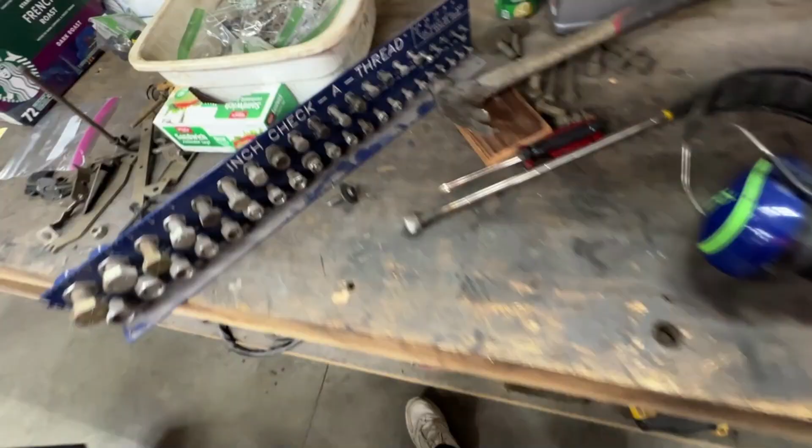I started straightening out all these bolts and I just decided I'm going to finish. I don't like this. I don't need all this stuff, and when I go searching, it just takes too long. I mean, I got tons of stuff. I think it's easier just to keep it in bags.

Okay, so now I gotta whittle down. Look at this, those are lock washers. I went through and sorted all these. They're 3/8/16, I'll never need them. I mean, I might need one or two or three, but I never really do.

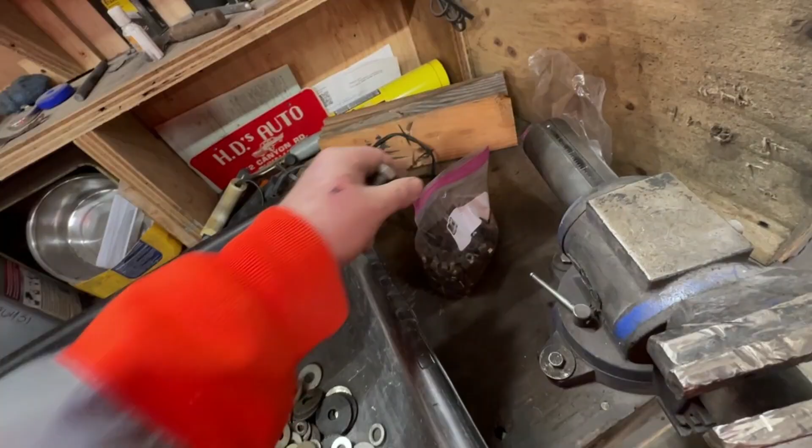Screws, washers. This is driving me insane. And I still got a whole bunch of smaller nuts. I'm making a little bit of headway.

I don't want any of that. Okay, I got two more of these. Again, they've been sitting around for 8 years. They're no good to me because I don't know what's in them.

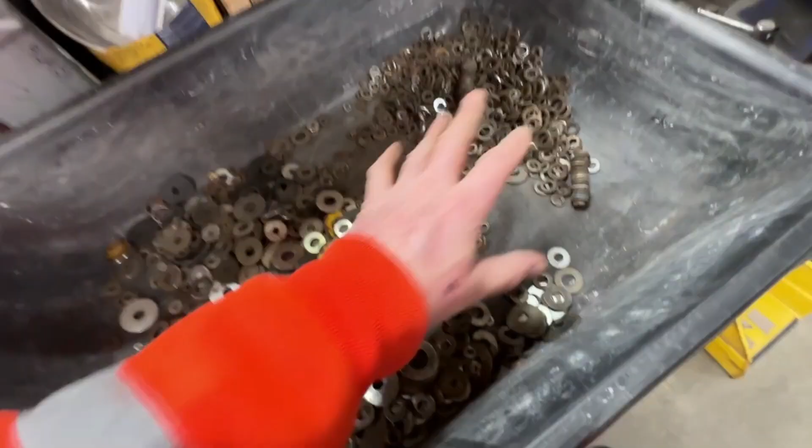Again, I'm just looking for little stuff like this. I found these. I'll never use these because I hate these locking ones. I don't think I need any more of these. Maybe I still got another thing of nuts. The socket I was been looking for.

See this here? Way back in the 80s, when we needed to get water on a job site, you put this on a fire hydrant, hook your hose to it, and then you can get water. A wrench to turn the hydrant on. So it's been sitting there 8 years.

Okay, I finished this thing up. So that's that size bolt, that size washers, lock washers, flat washers. These are all car parts. And these are my screws that I use when I do woodworking. Just put them in a bag and then dump them in here when I need it. Some nuts. Just oddball stuff, just another oddball stuff.

That's 3/4 full, it's heavy. Okay, I got this area straightened up. This is half full. I guess this is not quite 3/4, but there's a lot. This sucker is heavy.

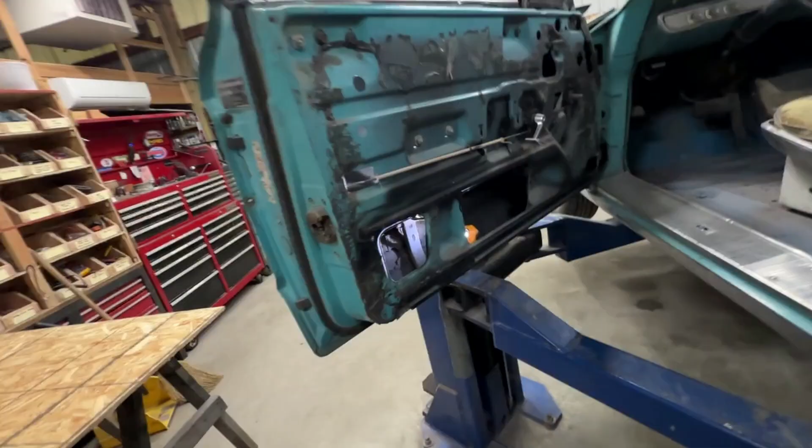Okay, so I gotta take this window out. So I decided to look at the book first. It's model 63C or 76B. Front door window mechanism, 63 and 76, page 1733.

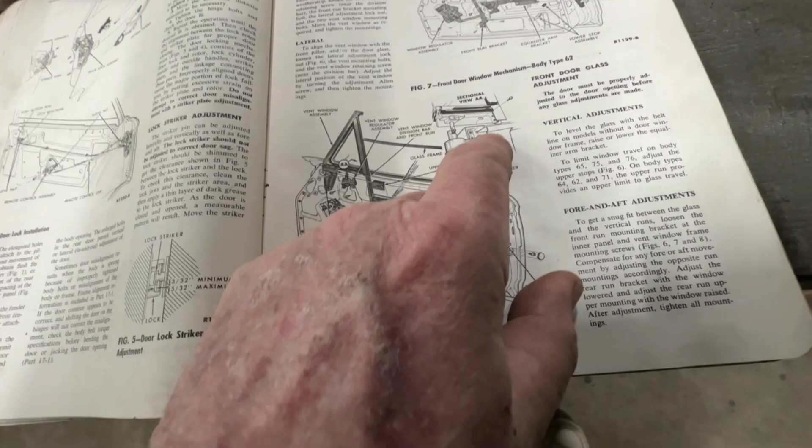So I'm just gonna look at this, see if it looks the same. This is for adjustments, I want to find removal. So on page 1740, front door glass removal installation.

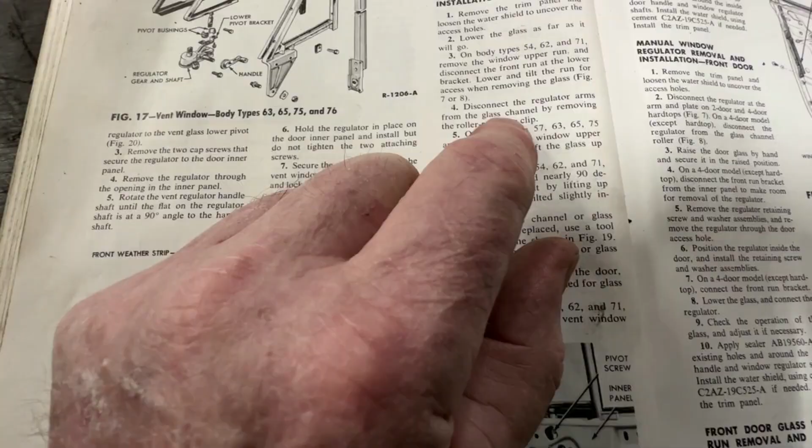Remove the trim panel - oh, that must be the inside door trim. Lower the glass as far as it will go, or disconnect the regulator arms from the glass channel by removing the roller retaining clips. There's a clip right there, and there's a clip right there. So according to this, remove those clips.

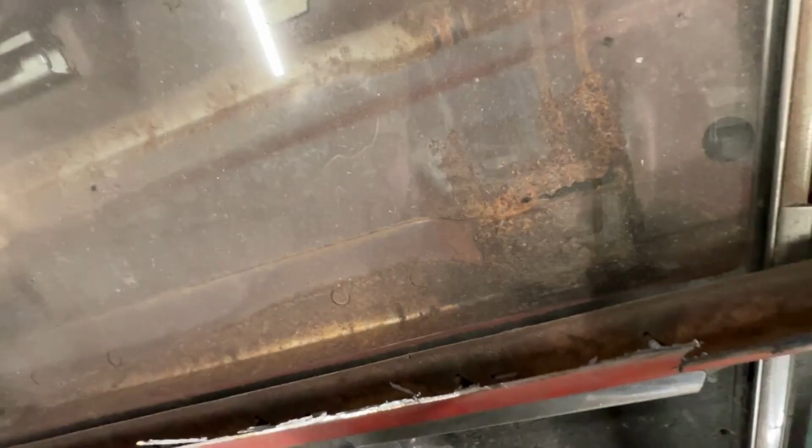Remove the window upper stops. Figure 6, here's figure 6. 63, and there's the upper stops. I guess these are them. I'm looking through, there's one there, and one there. It must be these two bolts here, and these two bolts here.

You see a clip right there, and a clip right there. This is the trim panel I guess they're talking about. And it should come out. It's pretty simple - that seems too simple.

Okay, I got the clips out. I just stuck a tool in like that and pried them out. Okay, so I got the stops out. This one I was able to slip through here. The other one I just dropped.

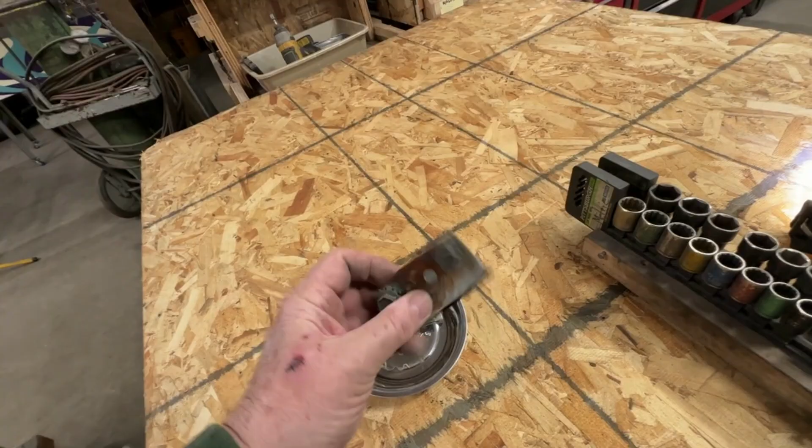But this has to come out because when the window goes all the way up, it hits here. So I'll take it out and then I'll show you how to do it. Yeah, undo that, undo a bolt in there. Undo these two, I believe. So we'll just look here.

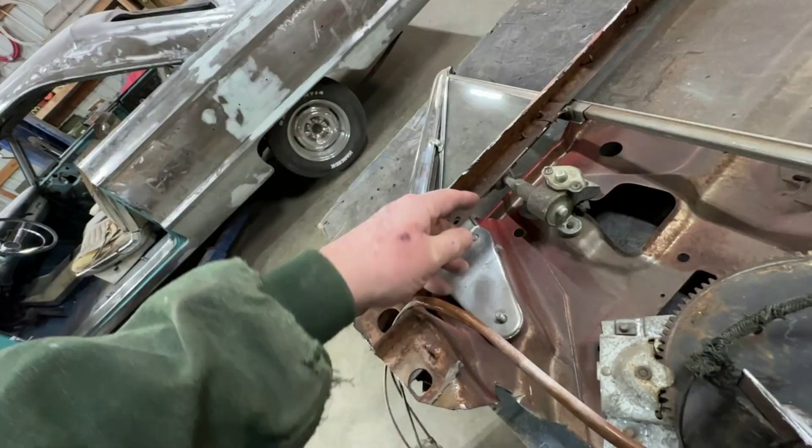So I took these three out here. I took that one out up there. You can see there's a hole to access it. And now I got to take this one out.

Can't film it, it's too tight in there. No, you got to take this out too because this window has to tilt, but it can't because this is in the way. So there's two bolts right there, I'll take those out.

There's this bolt down here. I was trying to pull it out. There was a screw right in here.

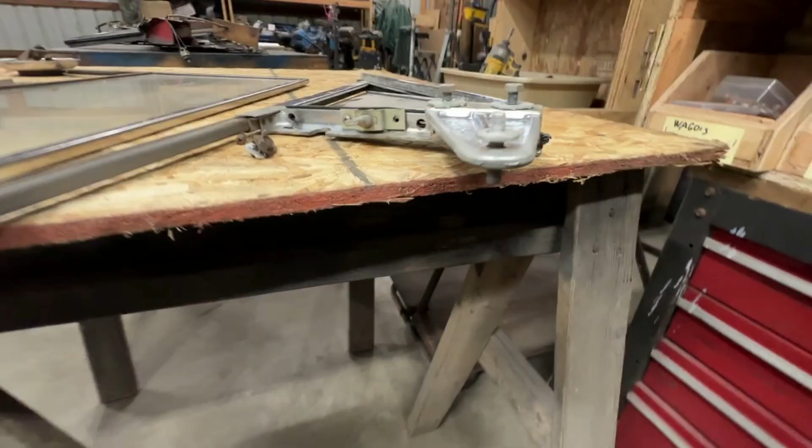And you take that out. Here's the pieces that go here. Now this piece right here, it was kind of hanging up on that, so I had to slide the window.

But this will come out, but this is an adjustment of some type. I didn't want to take it out. Here's the rollers for the window.

Now, once you pull these pins out of here, then you got to pull the regulator out of here. You pull the pins, pull the regulator out, it kind of snaps out.

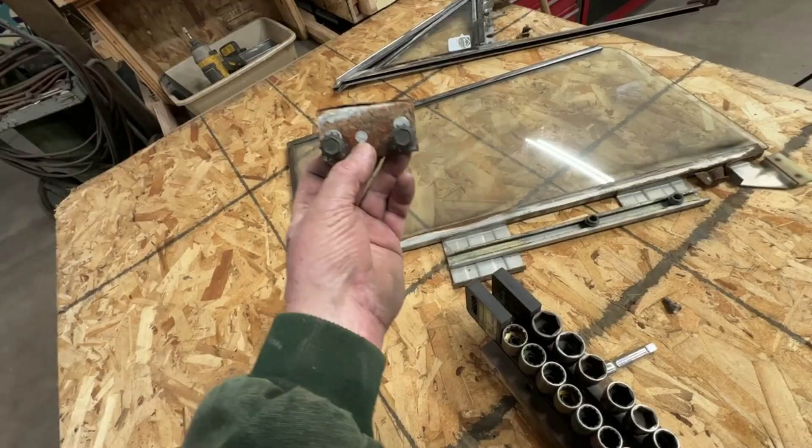Take these two door guides out that are at the top. This fits into the glass. You can see it's all worn out.

Then that's it for getting the window out. But this is in the way, so this has to come out first. Take these three out.

Again, this is adjustable. I could have took this out because it kind of hangs up. In other words, this has to go down.

I believe this. Trying to put the pieces back. I believe this was here like this. This was here.

It's this one. And this one goes here. Yeah.

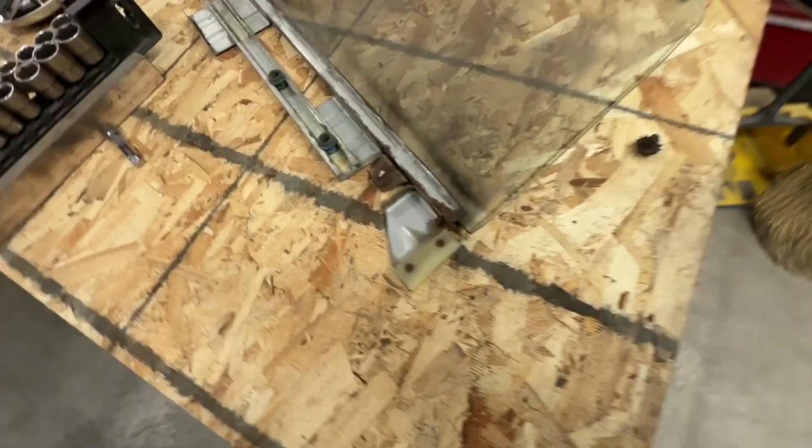Now just to inspect it, I mean it's rusted. The rollers are completely dry. But they're not wasted. What I did notice, see this piece right here?

I found this inside the door. I think this probably went right there. That's some kind of stop. It really should be on there.

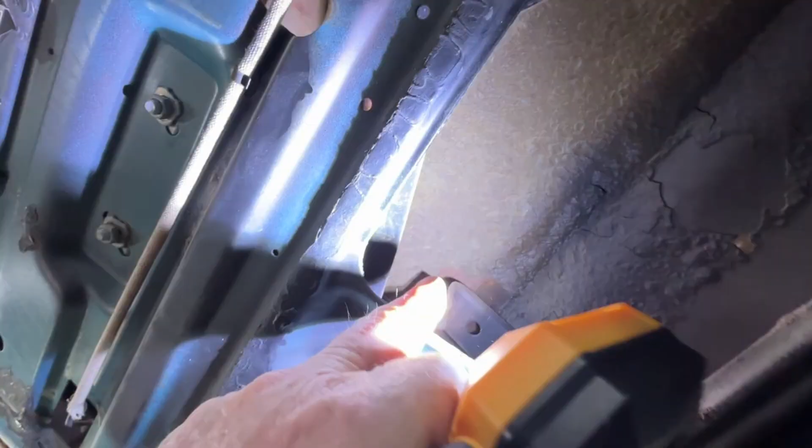And that's it. So, going back to here, let me turn this light on. And here's the regulator here and there. So the other piece is this.

Again, to give you perspective, the window slides in here, which has got some kind of material on here. When I go look at these, all this material is falling out of both of them.

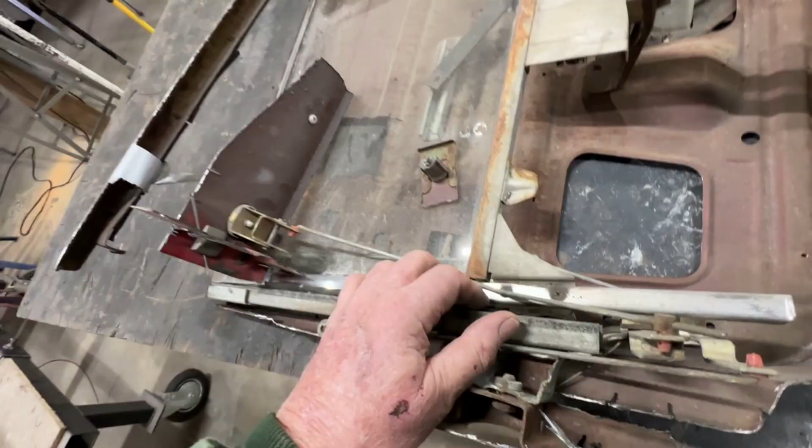There. And here. So really the window slides on this material on that side. On this side, there's some kind of material in there too.

How do I get that on there? That was held on by a rivet, but the glass has to come completely apart to get it back in.

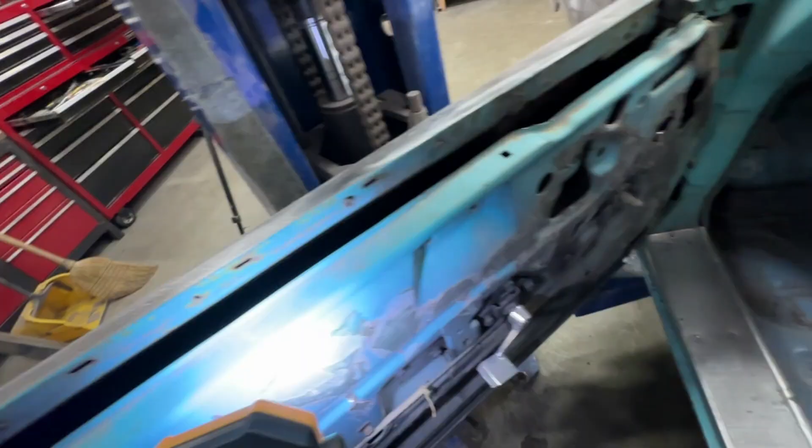Looking down inside the door, I don't think I need to take that regulator out of there. But if I did, 1, 2, 3, 4, 5, 6 bolts, but I don't see a need to take that out.

If you look down in there, there's that pin that has to snap out. But anyway, I gotta get the lock out. So let's go look at this one again.

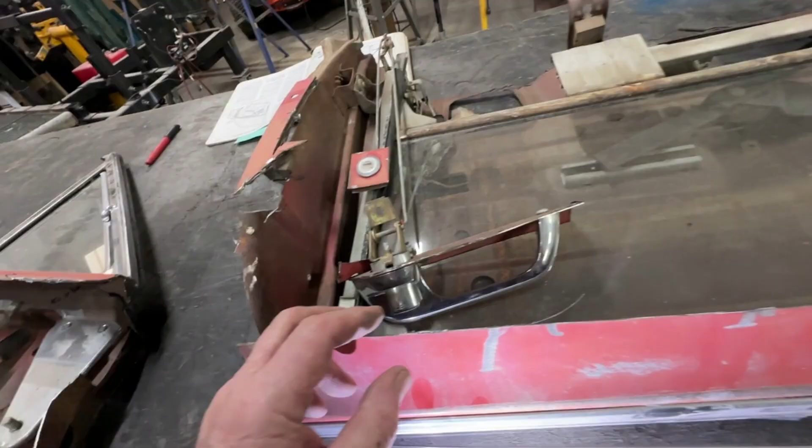So the window had to come out to get that out. Either the window has to be all the way up or out. Then I guess you put a screwdriver in here and a screw here.

So if I take those two loose, I'm just wondering how to get it out of here. Yeah, I got to take it off to paint it and prime it.

Now it looks like this screw has to come out of here. Or maybe the whole thing will fit through that hole, I don't know. Let me try it right here. I'll take these screws out, pop that loose, and see if I can get this out through here.

I wonder if they sell these pieces. I also have this clip here, but I could have taken it off.

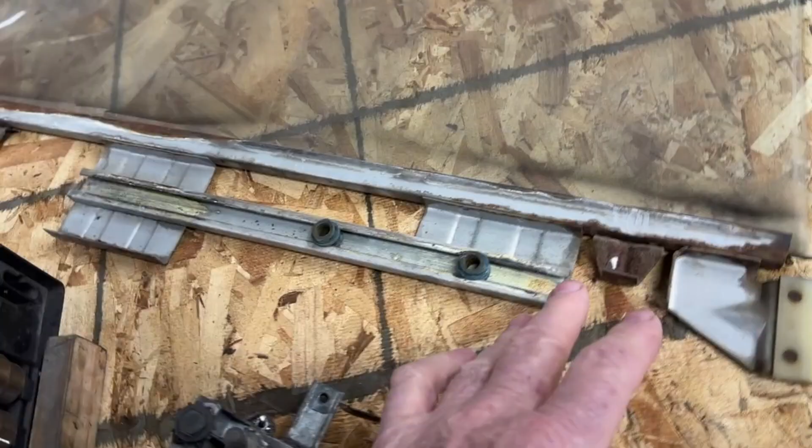But I was thinking last night, this window is missing this, or that piece is. Does this other window have that still on there? In other words, can I use this window?

Yeah. Again, this is why I saved these doors. This is why I tore it apart. Gives me an inside look on how things go together. And in this case, I can use this window.

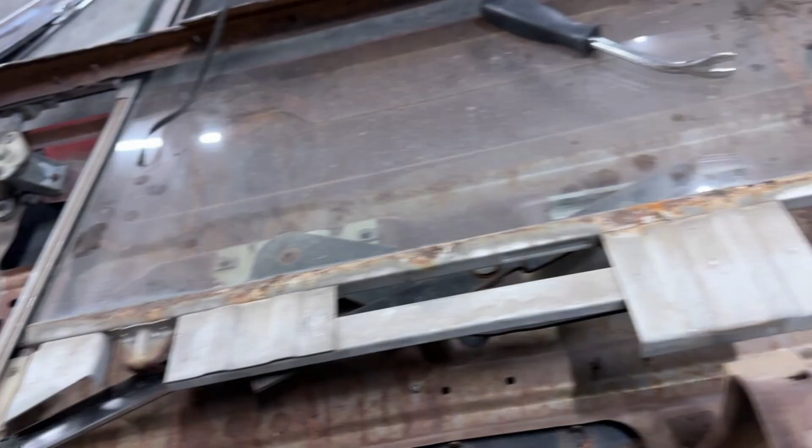Now again, this door is the driver's side. This is the passenger side. This door goes like that. And this one, if I was to stand it up, goes like this.

I think I'm gonna take this all apart next, at least the parts that I need for now. Again, it's just a big mess, it takes up my whole table.

That's the whole thing about working on cars. Okay, what else am I gonna do before I take this apart? I usually take a lot of pictures, but even pictures are hard to find. But anyway, this is for me - this is how it's gonna go together later.

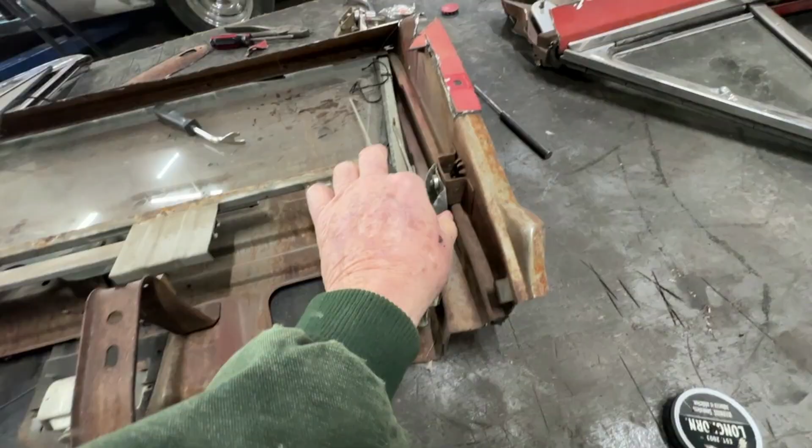This rod is the shorter one, I think. That's the key, I think. This is the longer one. This is the push button, I think - so I already forgot. We'll go over and look at that one. This has got an adjustment here, by the way, it's threaded. So let's see what else can we see that I might forget.

Now here's a back view of the lock. I can't remember if I said this or not, but this mirror, which I might use - how does that, this will not physically fit through that hole. So did they put this together here on this end, or does it come apart inside of here somehow? So that's another mystery I got.

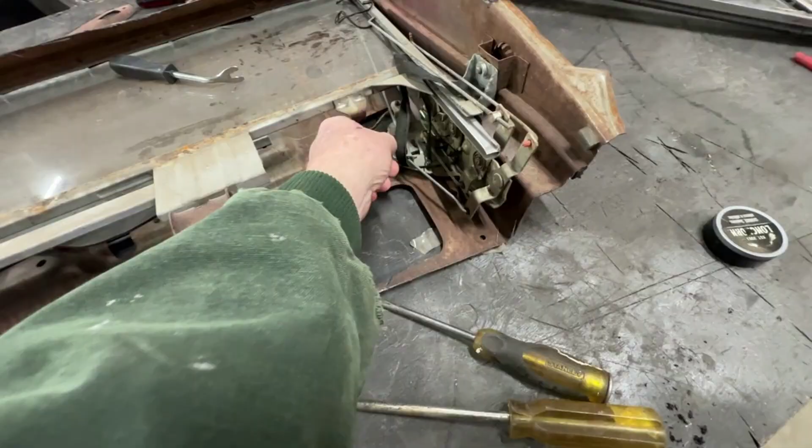We already went over this. Let me just concentrate on this one more time. So there's also two rods down here. This rod is going up to the door latch pull that you lock your door from the inside. And this one is - let's see, what does it do? It's part of the same mechanism somehow.

Let's see, it goes from the door pull, the lock pull on top of the door, and then it goes up to the key, I believe. So I think that's enough information. Then we got this other one in here that is going - I can't see where it goes. Let's see, where would it go? That must be the door handle. So the door, let's see, how does this work? You can unlock your door with a handle, with a pull, or the key. I think that's it, I think that covers it.

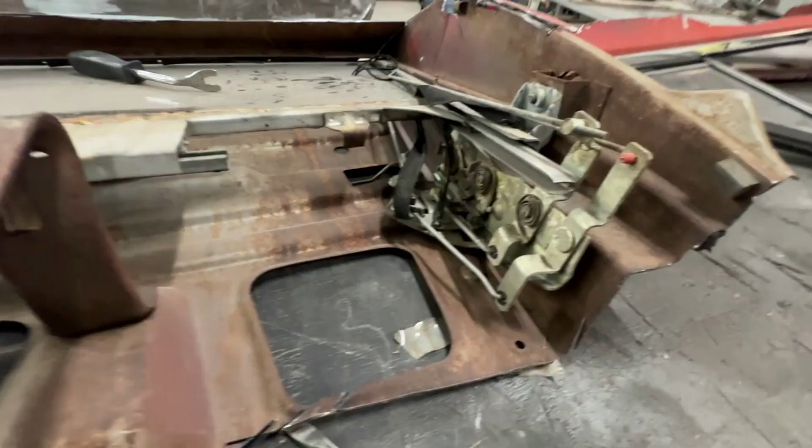I'm gonna do close-ups and go slow.

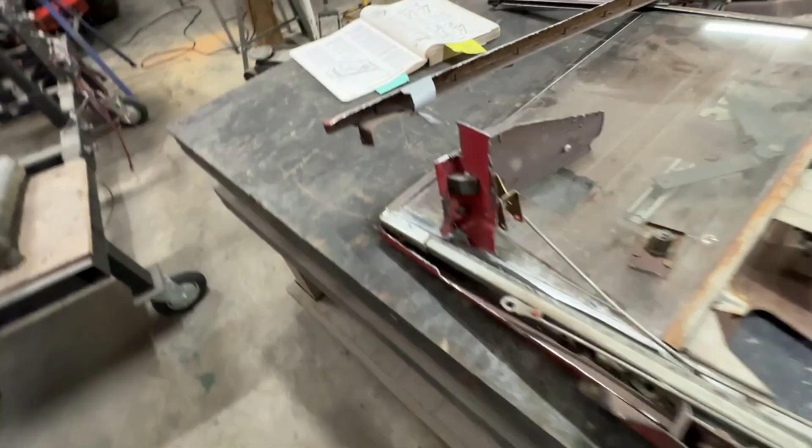I think that's it, so let's just - I was asking myself a question. This longer one, we'll go to the other door. This longer one does go to the key - to the lever, not the key. And the shorter one is the key. And again, here's those pieces. They sell a different type, but I think they'll work, and you saw that I ordered them.

I don't know, I'm thinking I'm just going to take these doors completely apart and get rid of this metal. I don't think I need it anymore, because it's on video, right?

So on the light, there's a clip right here that holds the wire if I want to use the lights. Is there anything else that I need to remember?

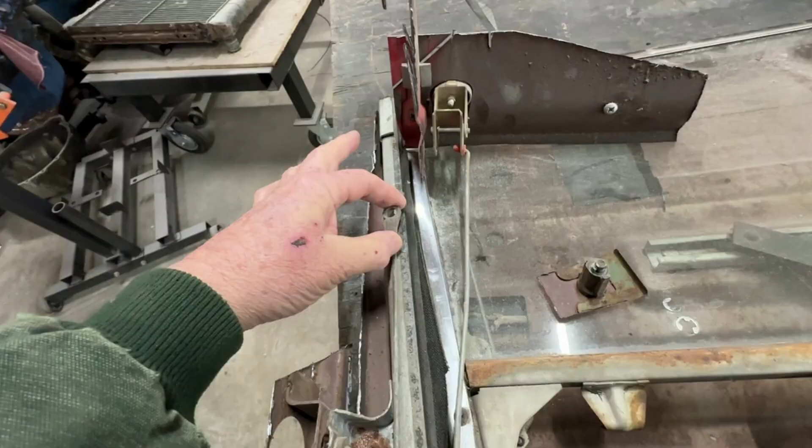Oh, let's just look at these clips, in case everything gets put in a pile. The littler clip is the key, and it happens to be facing straight up. I don't know if that's right or wrong, you know what I'm saying? This notch - I mean, maybe it goes that way, that way. I don't know, I'm going to try to keep all this together. We'll see what happens. Oh yeah, one more thought.

Are all these parts left and right doors? I don't know. And that mohair that I was talking about, like fabric, and it's really thin, so I don't know. I mean, maybe I could make it, I don't know. Anyway, these are just observations - they're on my video, I can look at it later. There's nothing worse than taking something apart and you cannot remember how it goes together.

Yeah, I think another thing I'm going to do is, for now, cut this open so I can get this out of here until I have time to think about it more. I want this in one piece.

So I marked this - again, I don't know if it matters - driver XL, passenger XL, and then same thing, but not XL.

So what can I take? The thing is, it needs to be flipped over to take apart, except I can take - let's see, I gotta flip it over.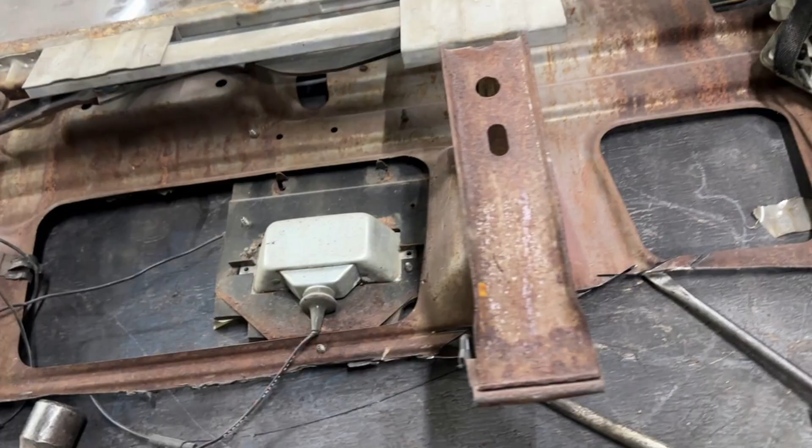Anyway, that's where I'm at. I guess maybe I'll film this - anybody interested? But basically, you saw everything. Everything that I know, you know now.

The other thing I was wondering, are these opposites? So here is the one I took out of this car, out of the non-XL, the driver's side. So we'll go - this is the driver's. No, we'll go to the passenger side.

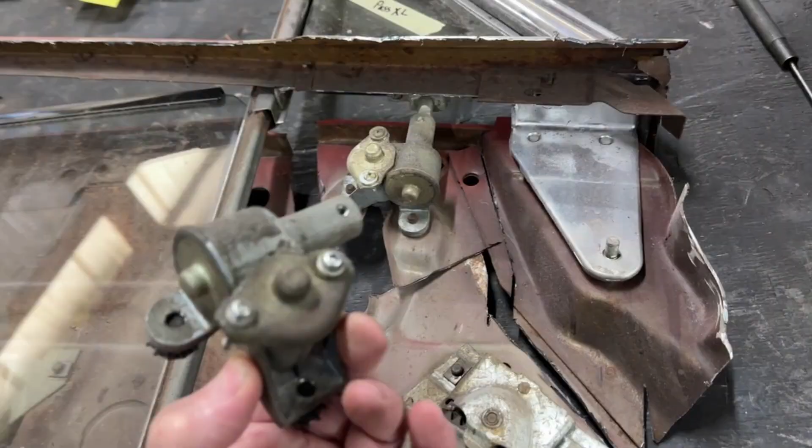Yeah, they're opposites. So these are opposites. If anything else is an opposite, I don't know. Probably everything. Which reminds me, let me put this over on this table for now to keep it organized.

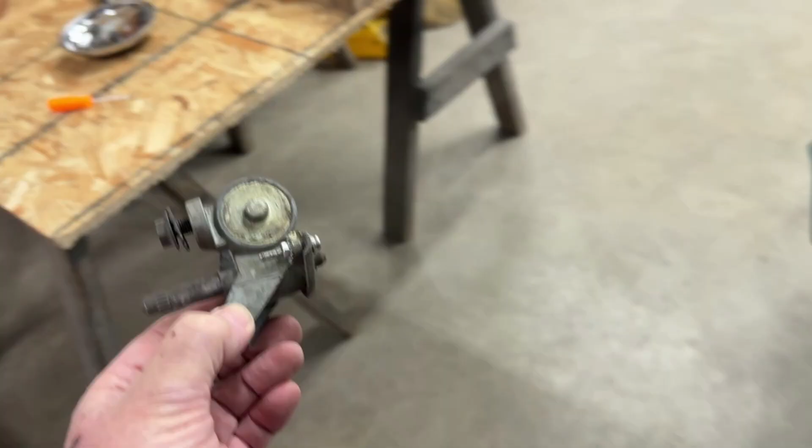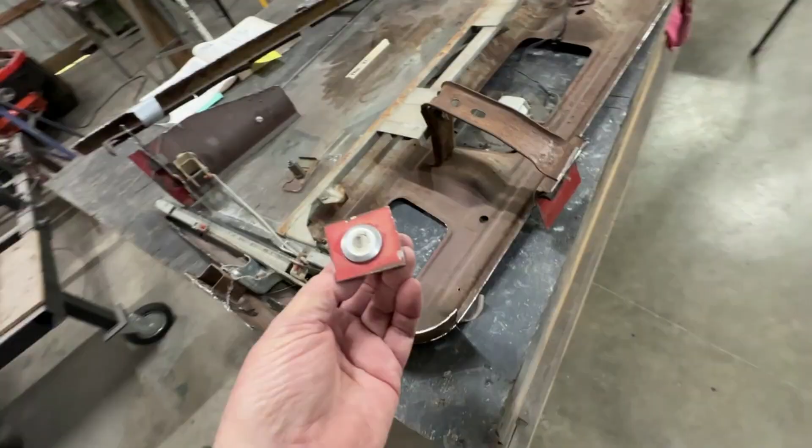Are the keys different? Let's see, I haven't taken that one out yet, but where am I? This is the one from the driver XL. This is the driver XL, and this is the passenger. So what does that mean?

And what did I do with that rod? It's already... I got to keep track of this stuff. Let's see, is it different? I don't know what's top and bottom. I don't think it matters.

I got to take two of these locks into the locksmith to get them keyed. And by the way, there's a big clip here that holds this to that.

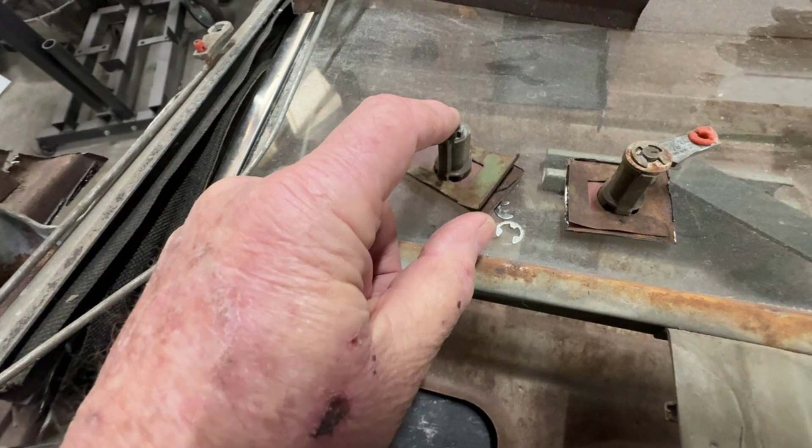Again, for me, because I might have forgot, this is for me. This is how this looks. There's also a rubber bumper here.

That's got to be it, right? What else do I need to know? I think that's it. Except, what did I do with that piece? Where is this piece? Oh, it's right here.

I'm just wondering, does it matter when you put it back in the car? You see this side bump here. I'm sure one of them goes up and one of them goes down. Or else the lock is upside down.

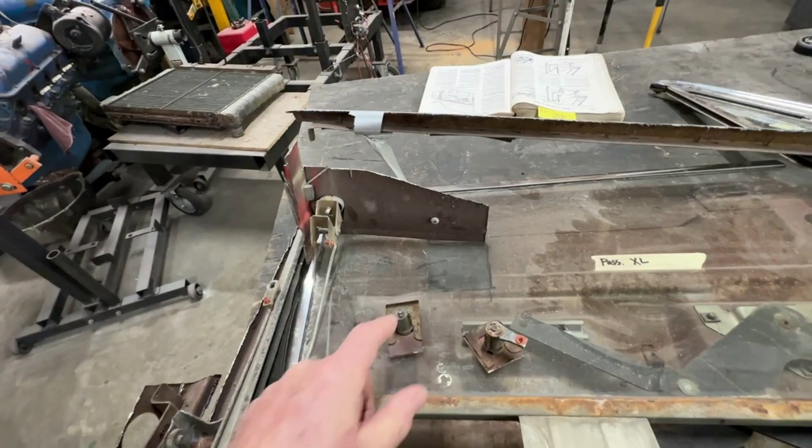So I'm gonna go look at this car. I'm gonna try to add that into this video. Does this go up or down or sideways or what? Okay, let's see if we can figure out that question right now. Again, this information will be valuable later.

So looking down inside there, this clip right here, you pull it out from outside the door. See, there's a long side and a short side. Yeah, the short side is up.

Another thing I wanted to document is this rubber piece right here. I mean, this one looks okay, but that's where that piece goes. That's it. I'm gonna take everything apart.

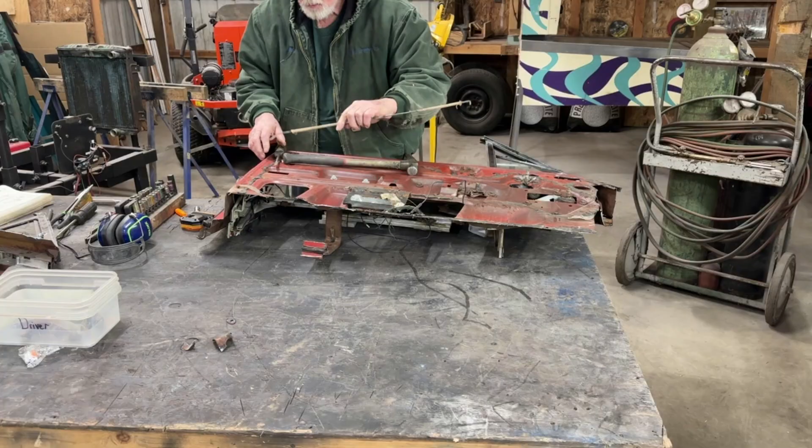I think there was a screw there. It's all rotted.

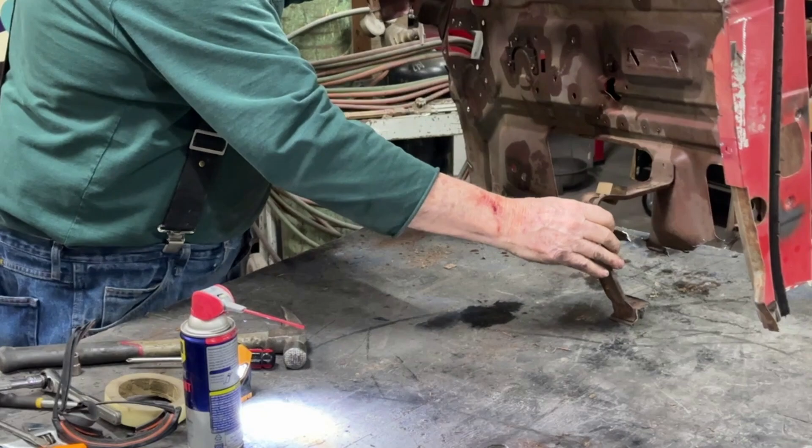That's the bottom doorstop. This is all garbage now.

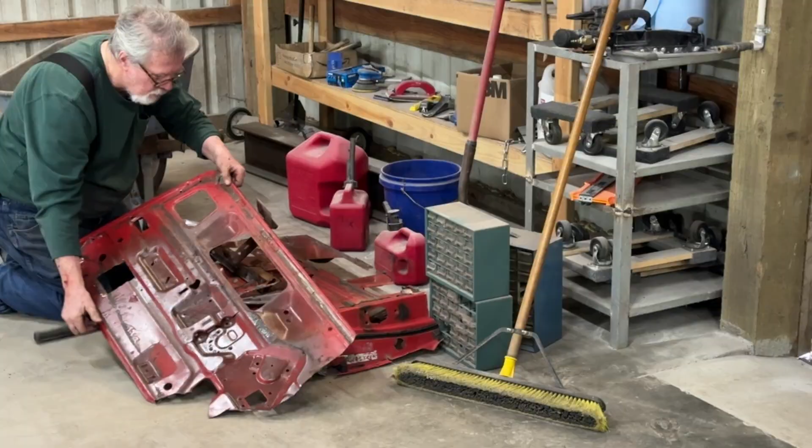Anyway, I took apart those doors. I think it took like an hour and a half. Right now it's just a big pile of stuff. So this is the passenger side. This is the driver's side.

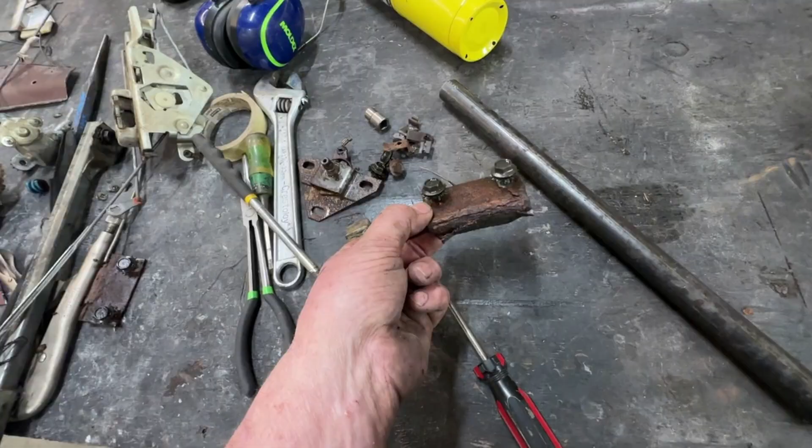The things that were the worst to get off, you saw, were these 3 screws here. And then these door guides at the top of the door. Remember earlier in the video, they're shot, they're gone. But I took them off.

You saw me cleaning up bolts. You just keep getting more and more and more bolts. Here's the cap off the side of the door. This gasket, I think, goes right there. You see this plate here.

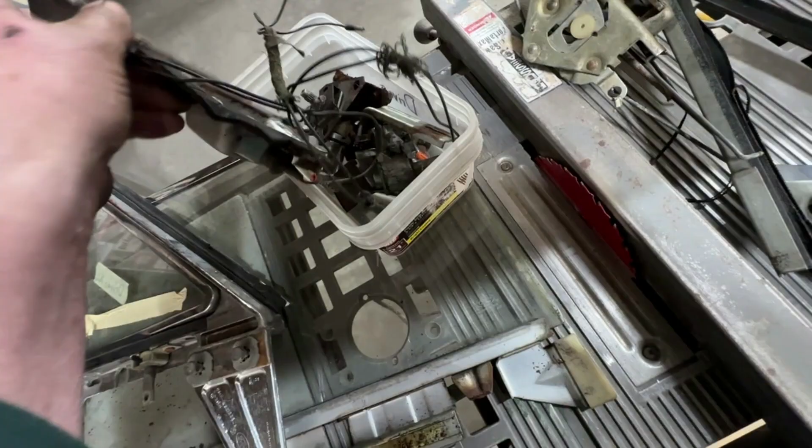This is the passenger. This one is totally rusted. So I want my table back. Somehow I gotta figure out how to do that.

Like I said, the problem with tearing apart cars, you end up with all kind of parts. I don't know. I'm not sure how to do that. I have to think about it. But anyway, I got everything apart.

If I need parts, I was pointing at this one. Remember I was standing on the window that came out of that car? One of these was broken off. Well, the driver's side over here, they're both on. So yeah, I guess I could sort through parts.

So this one is better than that one, and so on. Maybe that's what I'll do. Well, I can't, I don't know. I'll probably set up a table over there, just until I'm done, out of the way, so it won't bug me.

So the next thing I'm gonna do is take these off. Again, I gotta rebuild the window, this piece. These aren't bad, I guess. Like I said, I'm just keeping busy. Keeps me away from the TV, keeps me from sitting on a couch, keeps my body moving a little bit.

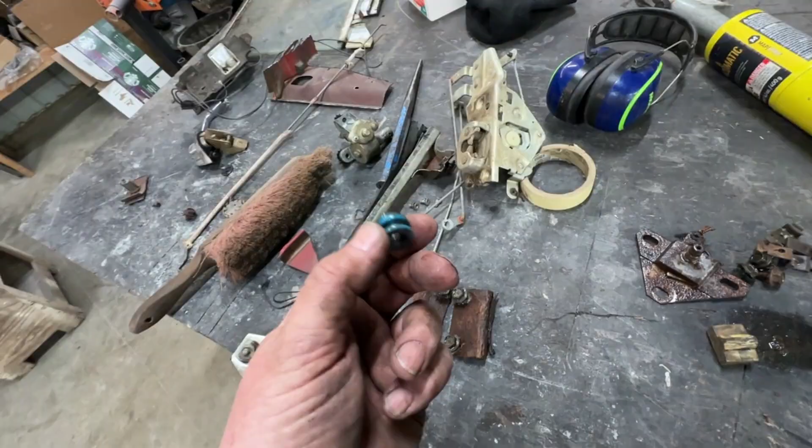Now these things, I don't know if you saw it, the pins, these were frozen on here. I'm not sure why, but that means these did not spin. They're supposed to spin. What I try to do is put the nuts back at least where I found them in the parts, even if I never use them. A pile of bolts means nothing, you forget where they go.

Yeah, so that's probably it for today.

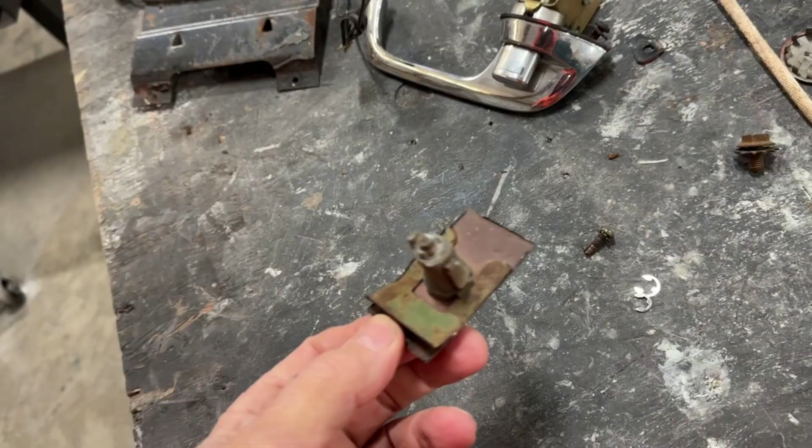Today's Friday. I was looking at my videos and I just want to get something clear for myself.

So what I want to know is when this is in the door, like that, like this, I don't know. But this came out of the car. And you notice one side has a long edge and the other one has a short edge. And there's this clip holding it on. So I just want to try to get a peek down inside here.

So that's how it goes together. The short one is on top, see that lower block? And the arm is facing to the right. That's what I needed to know.

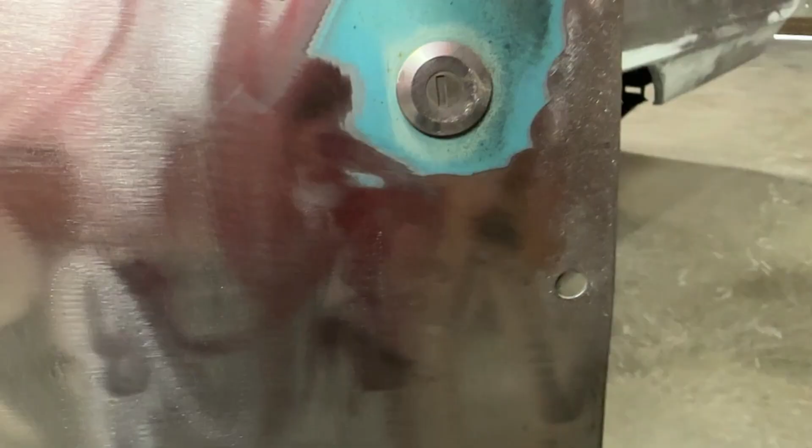I guess I'll look at this too. I don't know if it matters, it's more to the left. Again, I don't know if these things matter, but when they do, it drives you nuts if you don't know. Same thing, more to the left. I'm gonna stick the camera blindly into the door. I get it, but...

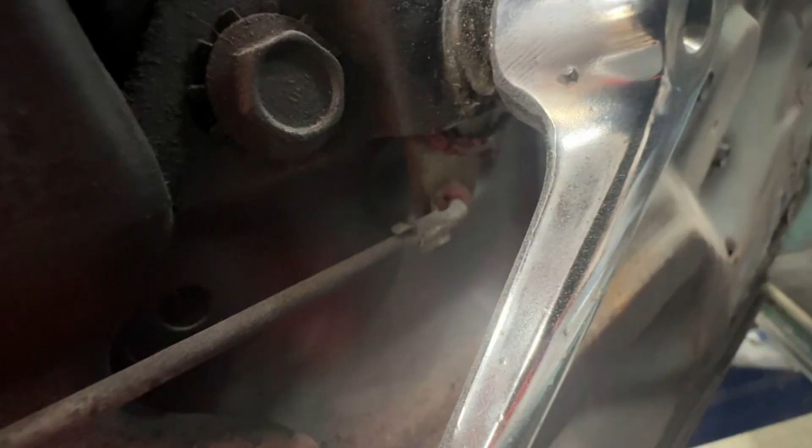And then down here, and then right here, and then right there, here. I can't think of anything else I need to know. And here's the guide looking down. Just gonna zoom.

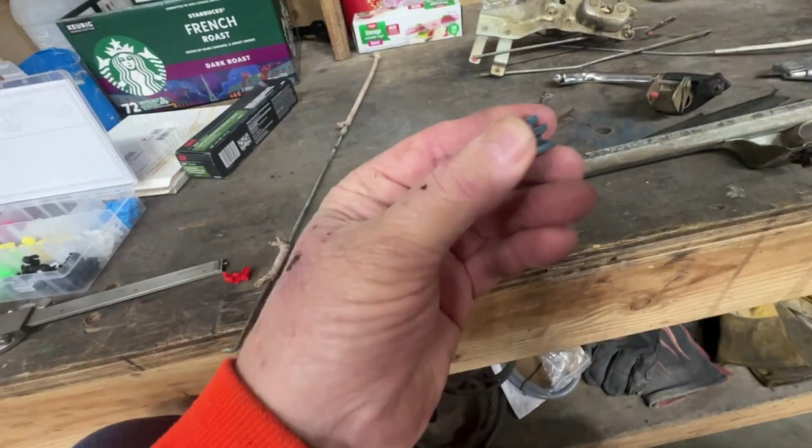This is Friday, so I'm just gonna go over the parts that I think I need to put this window back together. I need some of this material, and some of these because they're petrified and it was frozen. I think I talked about that. It wouldn't turn.

The regulator arm was frozen in there. I think these pins are okay. I need to get keys. Where these rods poke into here, I might need to replace those. A window guide that rubs against the glass needs to be re-rubbered, or it needs to have something happen on this part.

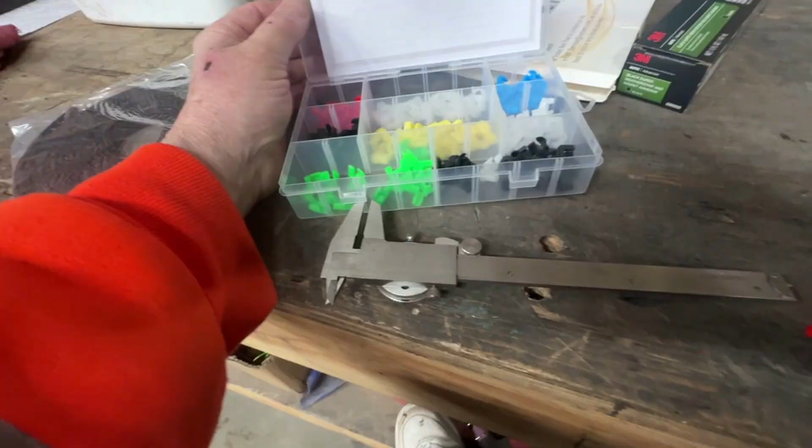And again, the keys are a no-brainer - the locks, you just take them in. So I ordered some of these, those are coming, and I ordered some material that I think will work in here. Also, I measured all these rods, they're all 3/16. But I put one of these red ones in, and there's enough to do both doors, I'm sure. And these come with a safety catch.

It won't stand by itself. With these, that's what holds it in place. Anyway, that's my solution to this.

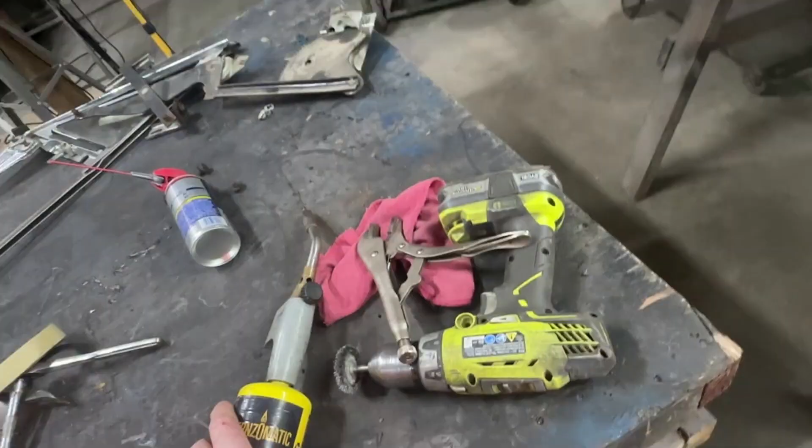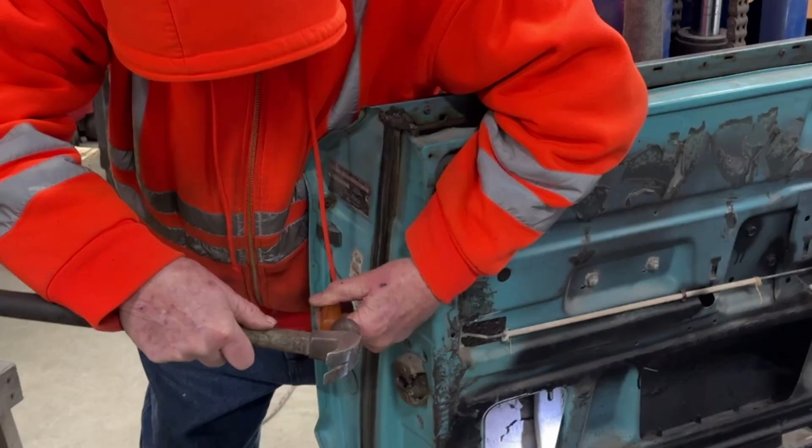I tried all kinds of things to get that off. You can't get in there, they're tight. So I just took the torch, stuck it in the hole, melted it, and it came right off. That would've saved me an hour probably screwing around with these things. Came right off.

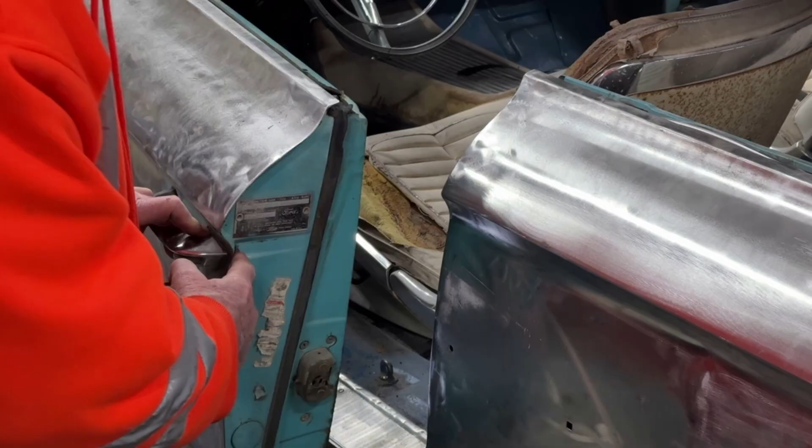Now I need to get this off. There's a screw here and there's a screw inside. This is the driver's door. I got the handle off. I got the lock off.

We know that this driver window is missing this piece. The rollers need to be replaced. The guide needs to be lubed with white grease. This is rusted. I got a driver's window under here.

I'm gonna pull this out. Again, these are on, this one's not rusted. So I'm gonna straighten things up and then I'll get back to it. This is the car the doors came out of - I bought it for parts.

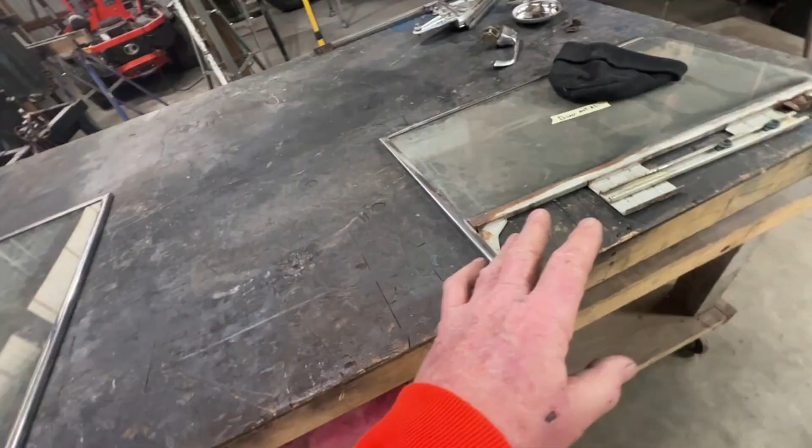Okay, I got this table straightened up. This came out of here. This is the window out of the XL front that I think I'm gonna replace. And over here is driver's side - I know that because of the mirror. And this is passenger. So I got time to do one more thing - I'm gonna yank this track out of here.

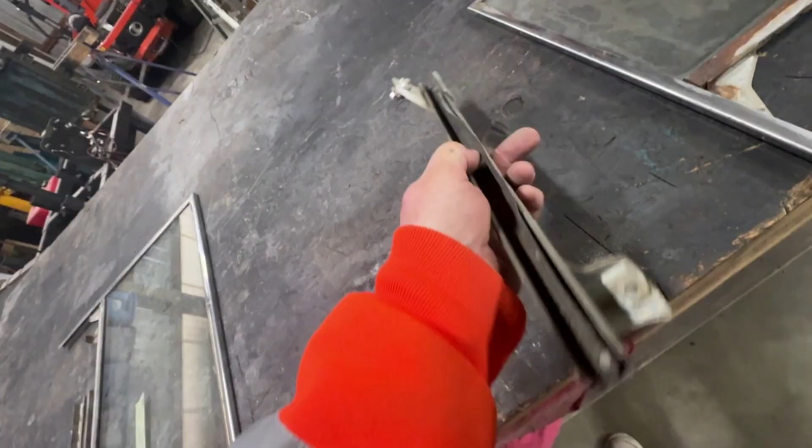So like I said, this material is not bad, it's just folded over. Down here it's off. But I got that stuff coming and we're gonna see what it looks like.

I'm feeling this window, it feels really rough. It might just be sap.

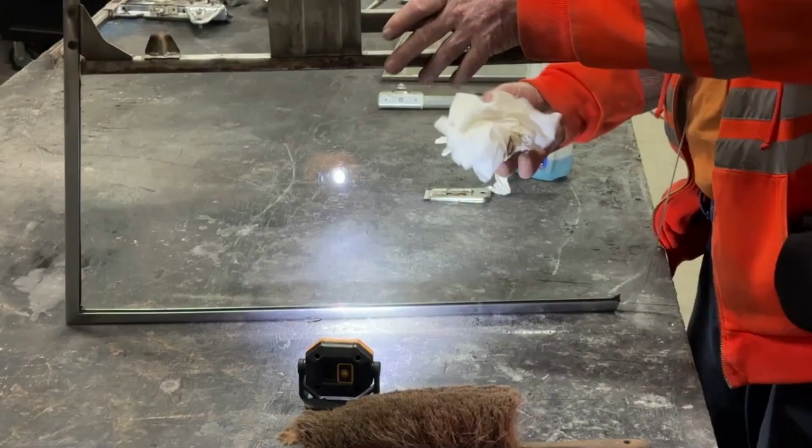Okay, that's all I'm going to do this week, but let's just look at it. The main problem with this window is this piece is missing. And this one's kind of bent, see it? This is here, this is here.

This has got the same kind of rust. This is not chrome, I don't think - maybe it was once, I think it's steel. Same problem on this one.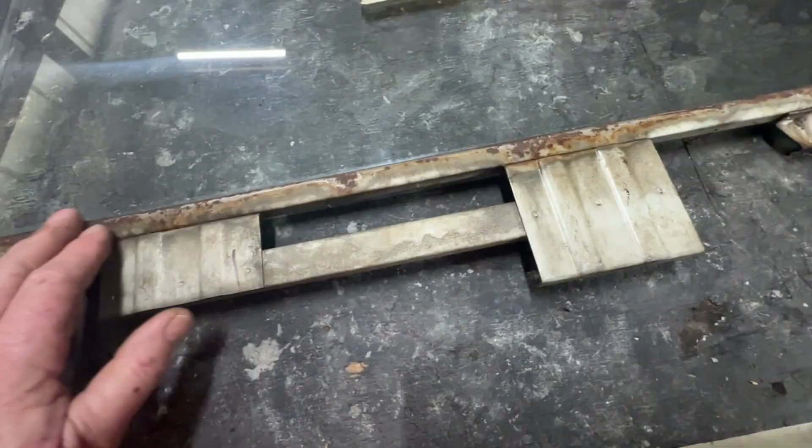This is in good shape, that's in good shape. Anyway, this is what I'm going to use. I'm just going to have to, I don't know, put some rust restorer on that. Maybe I'll do that right now and let it sit over the weekend.